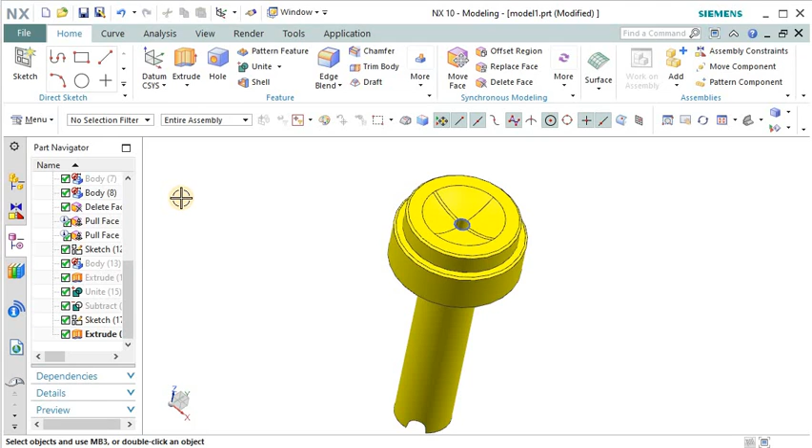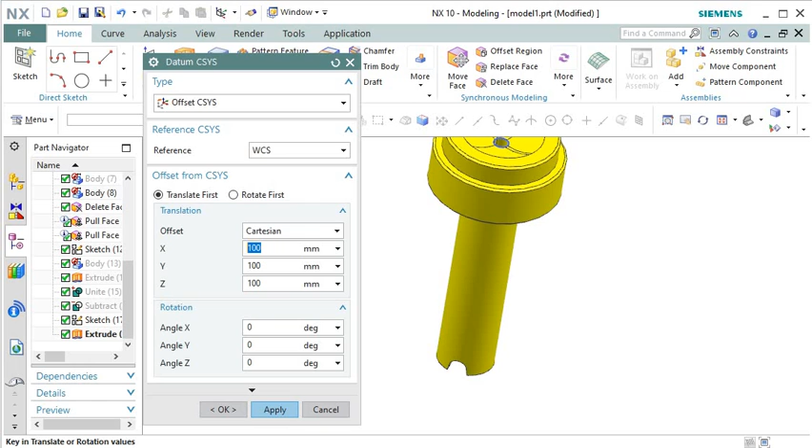Friends, today we are going to see the datum coordinate system in Unigraphics NX. In this video, we will go through the essential concepts and functionality of the coordinate system. Whether you are a beginner or looking to sharpen your skills, this video is designed to help you understand how to effectively navigate and manipulate the coordinate system for your design projects. We will cover the basic concepts of the Unigraphics NX coordinate system and how to set and modify it for accurate modeling.

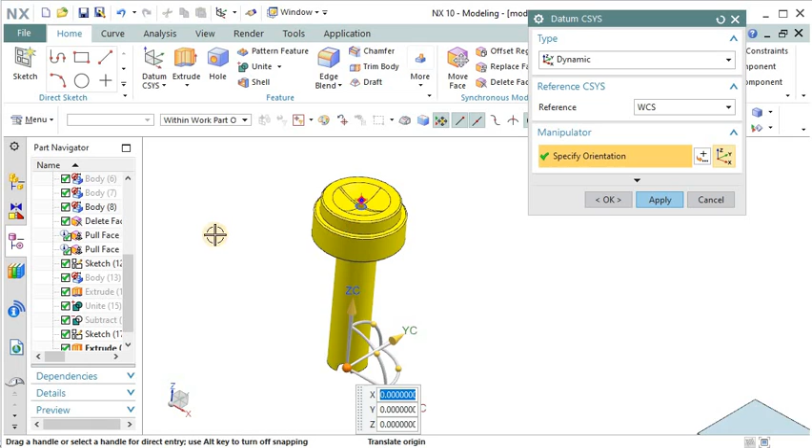So friends, let's start our today's topic, datum coordinate system. I'm going to click this icon. You can see datum CSYS has been opened. So the first one will be dynamic coordinate system. Wherever you tap, it will create the datum coordinate system.

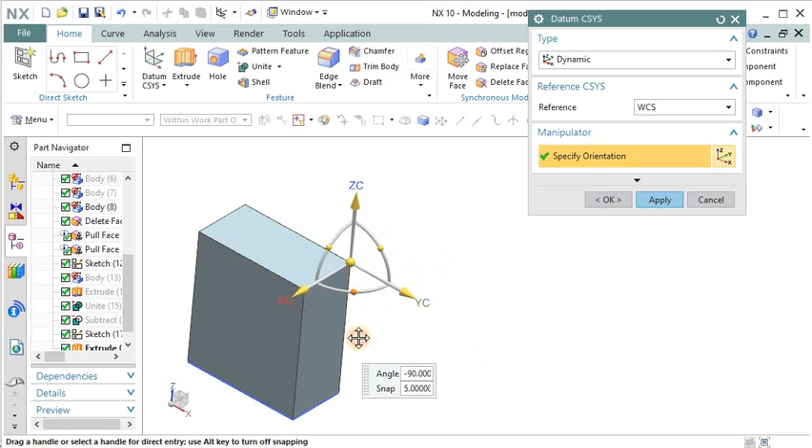If I tap here, it will create here. If I tap here, it will create here. You can rotate in any angle. See, the XY plane is being rotated. This plane also you can rotate. You can create it according to your need. This is the dynamic coordinate system.

Just going to apply. You can see a work coordinate system has been created.

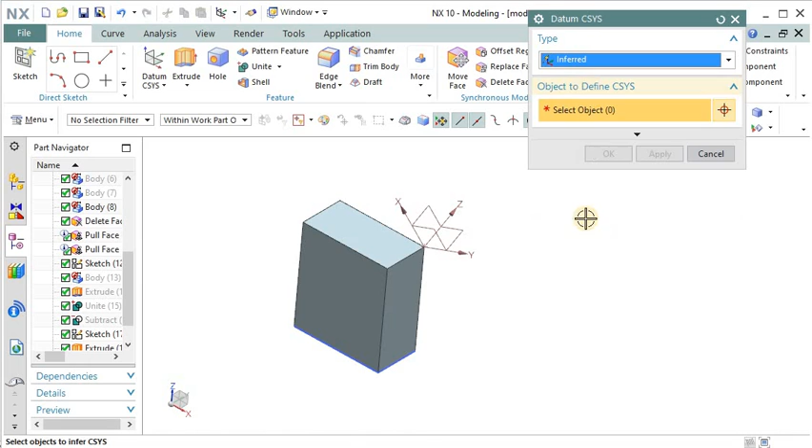The next option is inferred. Basically it will ask for three planes, 1, 2, 3. By default it will create a work coordinate system. See, it has been created.

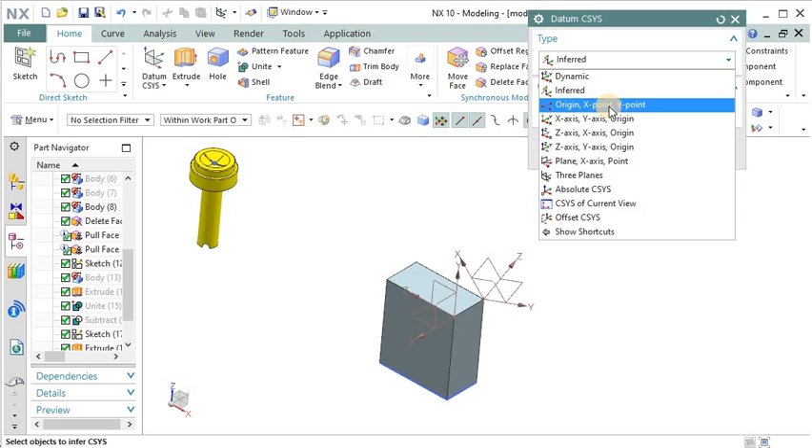The next one, friends, is origin, x-point, y-point. It is asking for an origin as well as an x-point and y-point. So my origin I will take this one, and x-point I will take this one, and y-point I will take this one. You can see a datum CSYS has been created.

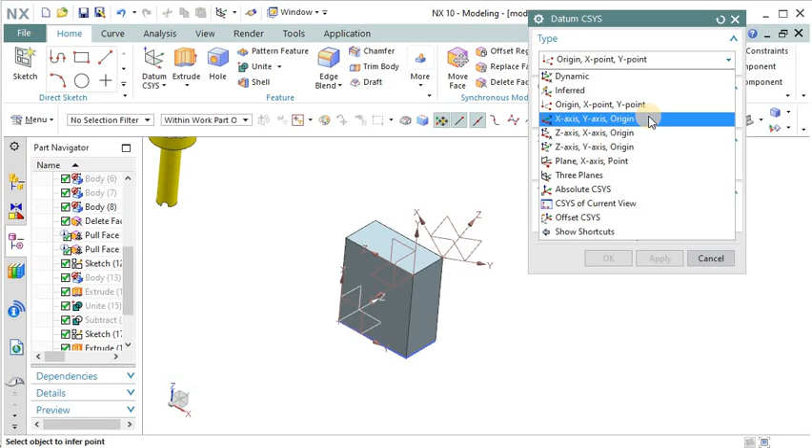Okay friends, hope you understand up to this one. The next one is x-axis, y-axis and origin. Unlike the last one, this is asking for an x-axis, y-axis and an origin. So I'm going to click, this is my origin specifically.

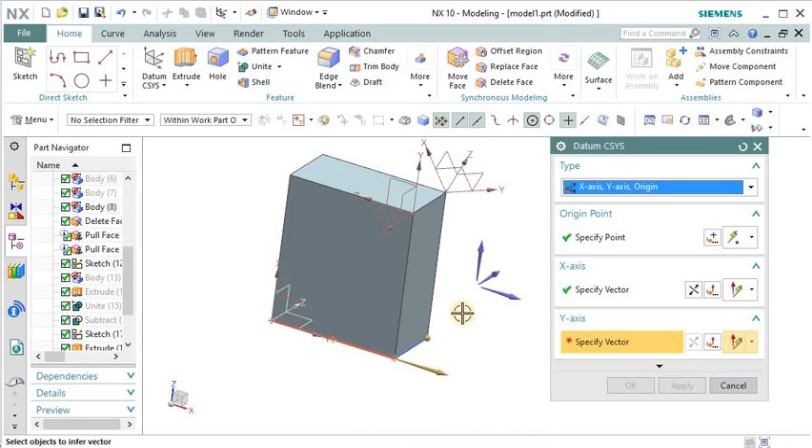You have to click this point, otherwise it will not take the end point. You should see this is active. So I am going to select the x-axis, this one. And it is asking for a y-axis. I am going to click this one, the y-axis.

See, a work coordination system has been created here. So friends, you can refresh it also.

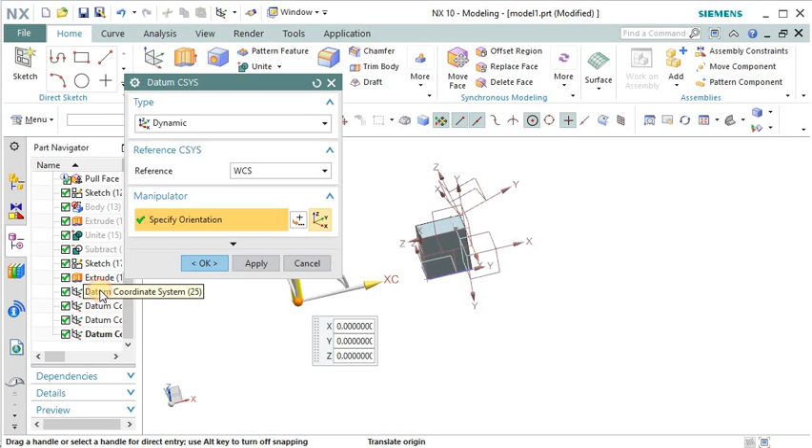I am going to refresh it, and I am going to delete this one so that we can understand the other datum planes easily. Going to cancel this one, and I'm going to delete all of this so we can understand the other points easily.

Okay friends, so the next point in datum coordination system, we have done up to the XY axis. These two are similar, this is x-axis only, this is z-axis, y-axis. These three are basically the same.

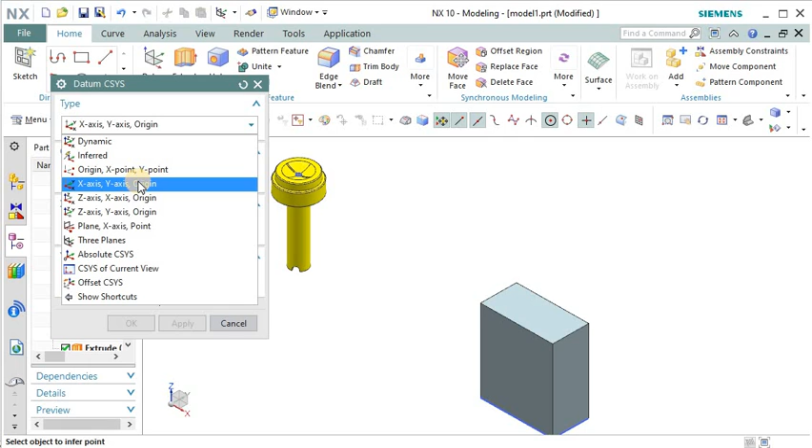So the next one is plane, x-axis and a point. I am taking a plane, this one. Now it is asking for an x-axis, I am going to take this one, and it's asking for an origin. I can take this one as origin, or this one, or this one. See, a coordination system has been created. I am going to apply this one.

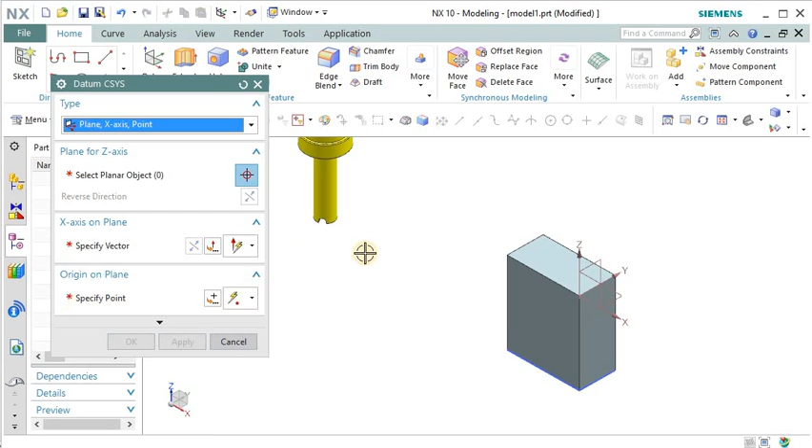So friends, the next one is three plane. It is simple as that, just you have to click three planes and it will create an axis. Apply.

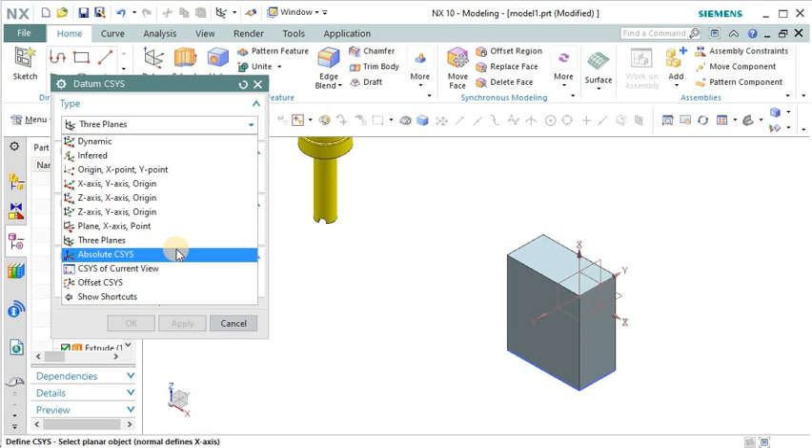The next point in the datum CSYS is absolute coordination system. Basically it will create at the absolute point. Just clicking here, you see this has been created at the absolute coordination system.

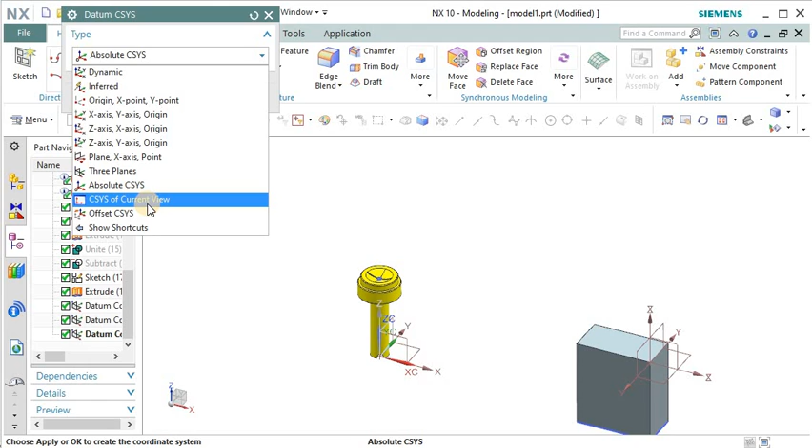Okay friends, we have done up to absolute coordination system. After that, this is coordination system for current view. Mostly we are not using this, but I am telling you about the offset coordination system. Just we have to give the dimension. I'm taking the work coordination system, this is showing 100.

Suppose I will give 50, 50 and 50. See, our offset distance of 50, 50, 50 has been created. A work coordination system has been created at a distance of 50, 50, 50 in X, Y, Z direction.

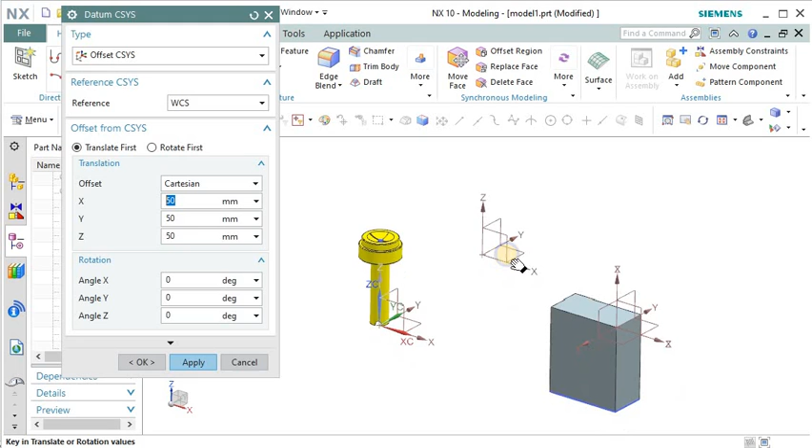Okay friends, this is all about work coordination system in Unigraphics NX. Hope you understand this one. We have already covered the interface, then we have covered the sketch, and we have already covered the datum plane and datum coordination system.